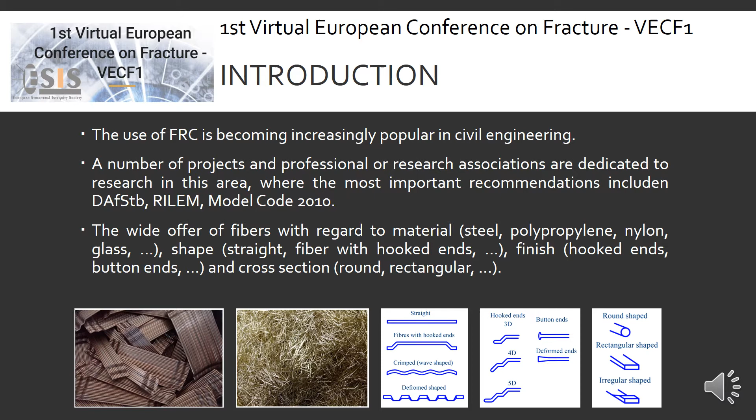It was proved many times that the addition of fibers to concrete improves the mechanical properties compared to plain concrete, especially tensile strength. In the case of fiber reinforced concrete, it is necessary to monitor the quality and control mechanical properties very carefully. Fiber reinforced concrete is widely used in the case of industrial floors, parking areas, foundation slabs, thin wall structures, and in reinforced concrete beams.

Still, existing knowledge and recommendations allow the use of fiber reinforced concrete for load-bearing structures to a very limited extent. The aim of the authors is to contribute to enriching the knowledge in the specific investigated area of fiber reinforced concrete beams without shear reinforcement.

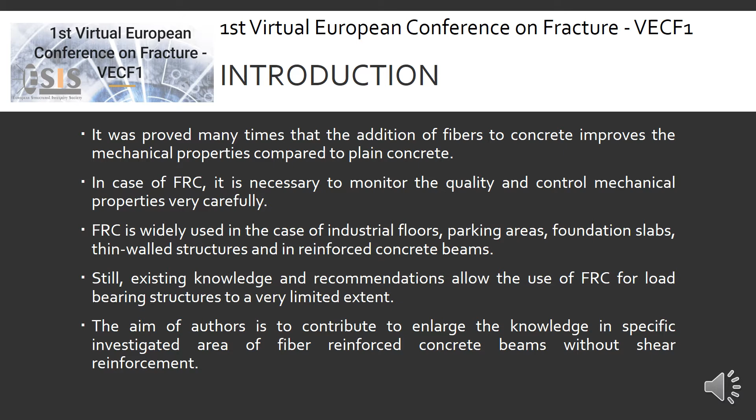A positive feature of fiber reinforced concrete is that when the first crack appears, the fibers in the concrete are activated, which are stressed until they are pulled out or broken, which adds dispersed reinforcement to the concrete. The tensile strength increases, but also the shape of the load displacement diagram changes. A change in the shape of the curve of the load displacement diagram of fiber reinforced concrete in comparison with plain concrete is illustrated in the figure.

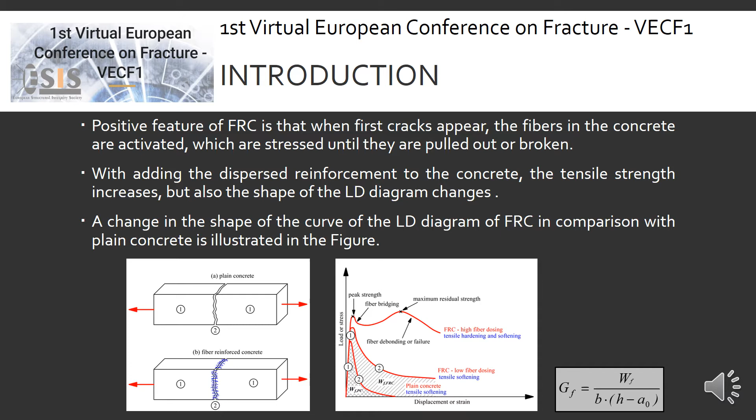The magnitude of residual tensile strength is influenced not only by the type of fiber used, but also by the dosage of the fibers. Fiber reinforced concrete structures are still able to carry external loads even after exceeding the tensile strength. Fracture mechanics or specialized constitutive relations are often used to describe mechanical properties of fiber reinforced concrete. Inverse analysis is also used to determine the mechanical properties.

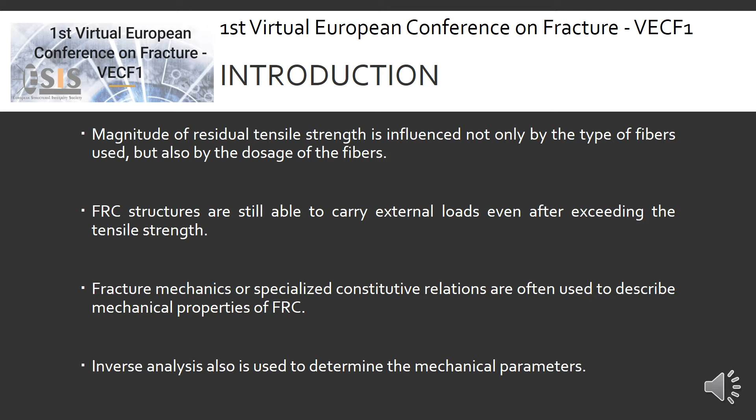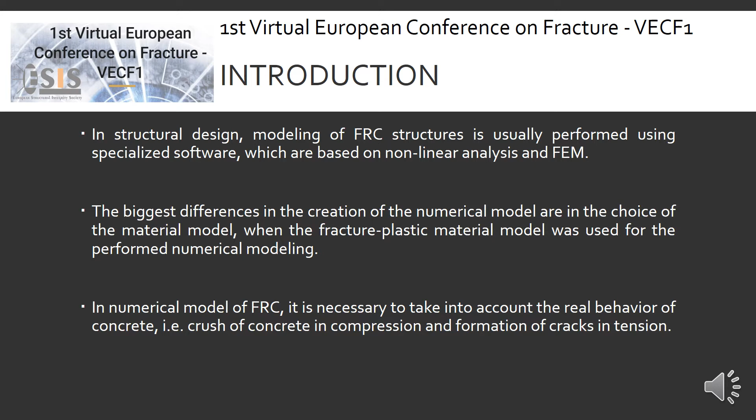In structural design, modeling of fiber reinforced concrete structures is usually performed using specialized software, which is based on nonlinear analysis and the finite element method. The biggest differences in the creation of the numerical model are in the choice of the material model, when the fracture plastic material model was used for the numerical modeling. In a numerical model of fiber reinforced concrete, it is necessary to take into account the real behavior of concrete, that is, crushing of concrete in compression and formation of cracks in tension.

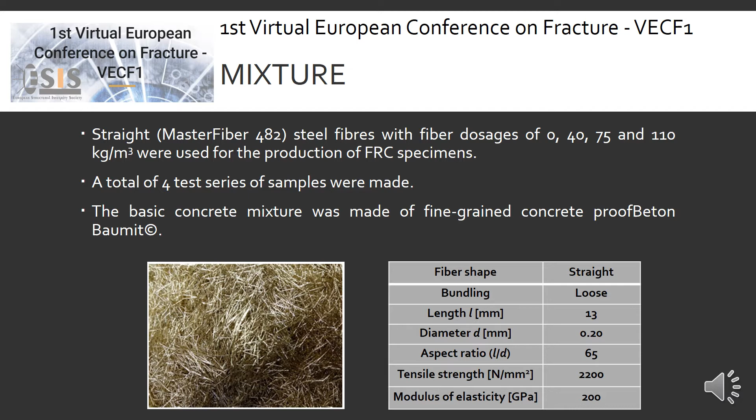The mechanical properties of plain concrete are: modulus of elasticity 27.1 gigapascals, cubic compressive strength 55.87 megapascals, cylindrical compressive strength 48.85 megapascals, splitting tensile strength 2.99 megapascals, and bending tensile strength 3.14 megapascals.

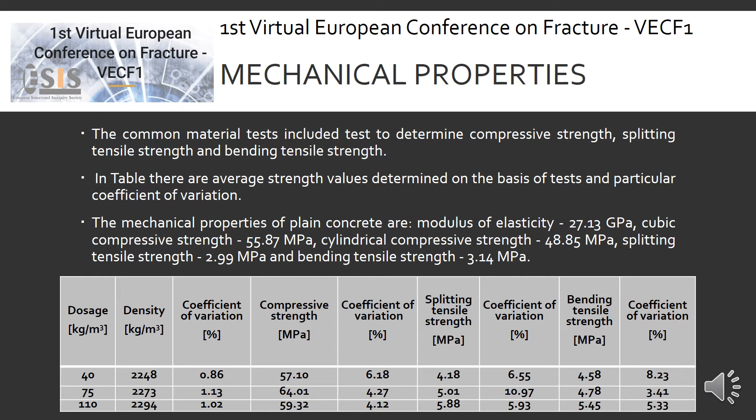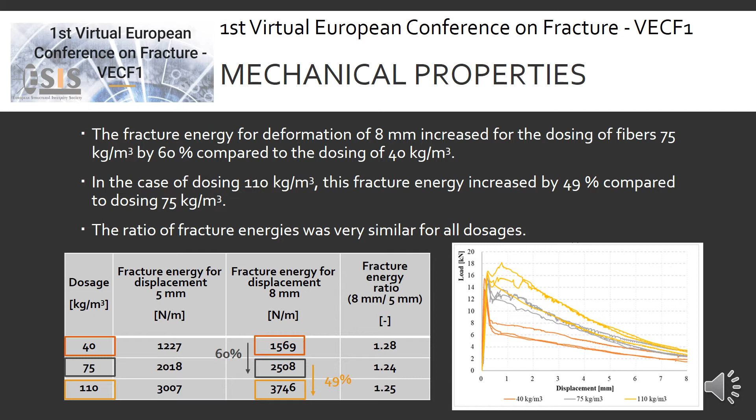Based on the 3-point bending test, the load-displacement diagrams were evaluated, which show the fracture energy for a deformation of 8 mm. It increased for the fiber dosage of 75 kg per cubic meter by 60% compared to the dosage of 40 kg per cubic meter. In the case of dosage 110 kg per cubic meter, the fracture energy increased by 49% compared to dosage 75 kg per cubic meter. The ratio of fracture energies was very similar for all dosages.

Research into basic material properties was followed by experimental testing of beams with a size of 150 by 150 by 700 mm. Beams with 2 reinforcing bars at the lower bottom, diameter 10 mm, and concrete cover was 20 mm. 2 beams were tested for each fiber dosage. Total of 8 reinforced concrete beams. The test scheme is shown in the figure.

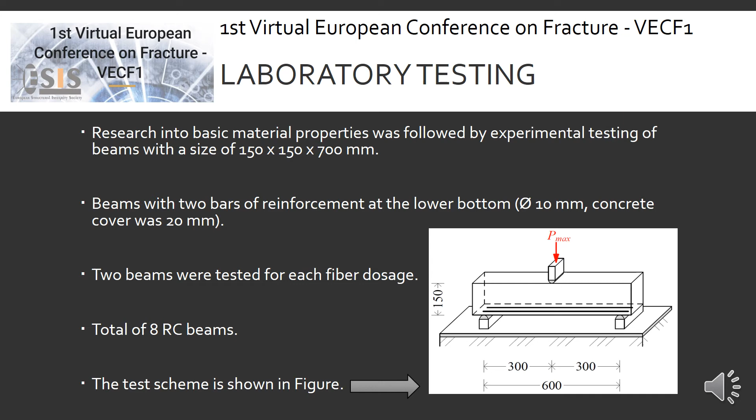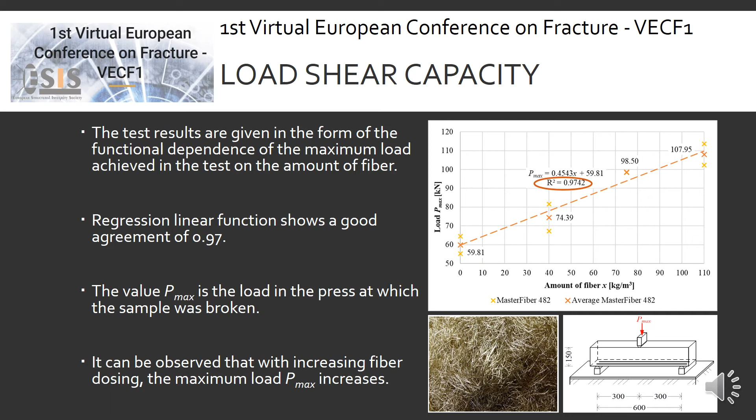The test results are given in the form of the functional dependence of the maximal load achieved in the test on the amount of fiber. Regression linear functions show a good agreement of 0.97. The value of maximum load is the load in the press at which the sample was broken. It can be observed that with increasing amount of fiber, the maximum load at which the beam has broken increases.

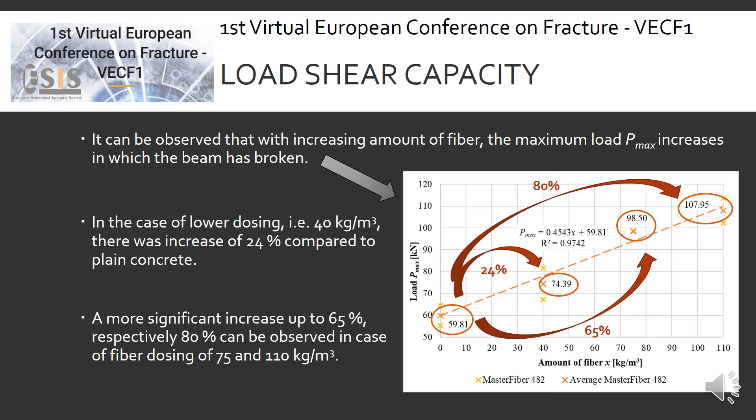In the case of lower dosing, that is 40 kg per cubic meter, there was an increase of 24% compared to plain concrete. A more significant increase, up to 65% and 80% respectively, can be observed in the case of fiber dosage of 75 and 110 kg per cubic meter.

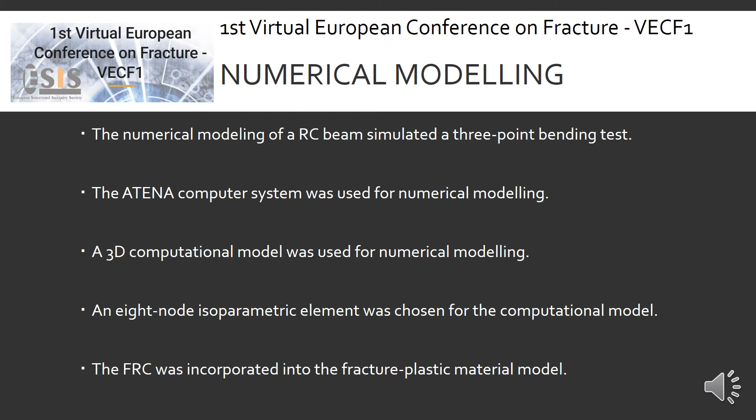Now to the part on numerical modeling. The numerical modeling of the reinforced concrete beam simulated a 3-point bending test. The Atena computer system was used for numerical modeling. A 3-dimensional computational model was used, and isoparametric elements were chosen for the computational model. The fiber reinforced concrete was incorporated into the fracture-plastic material model.

Nearly all the input parameters were taken from laboratory tests. The value of the specific fracture energy only was approximated, when the calculation was repeated iteratively. Two concepts were used to model fiber reinforced concrete. The first concept, for fiber dosing 40 kg per cubic meter, is based on the use of effective values of tensile strength and fracture energy. The second concept, for fiber dosing 75 and 110 kg per cubic meter, is based on the actual modeling of the concrete matrix and fiber reinforcement.

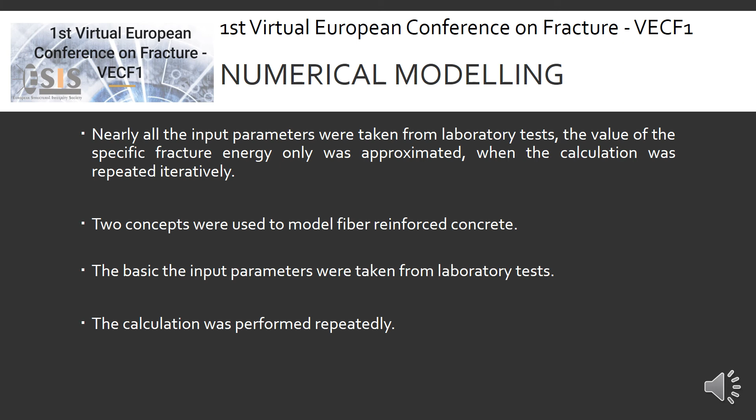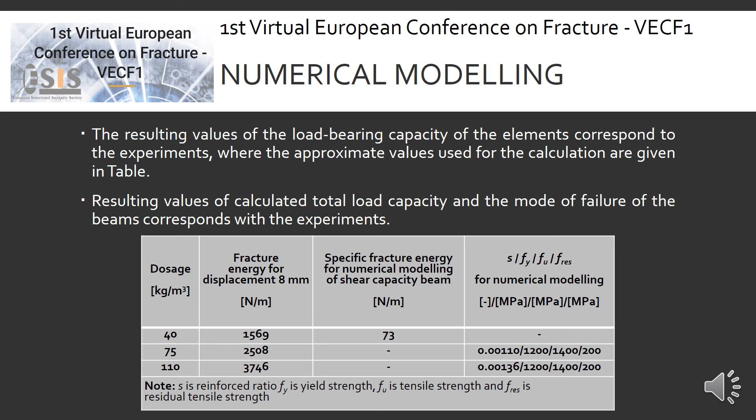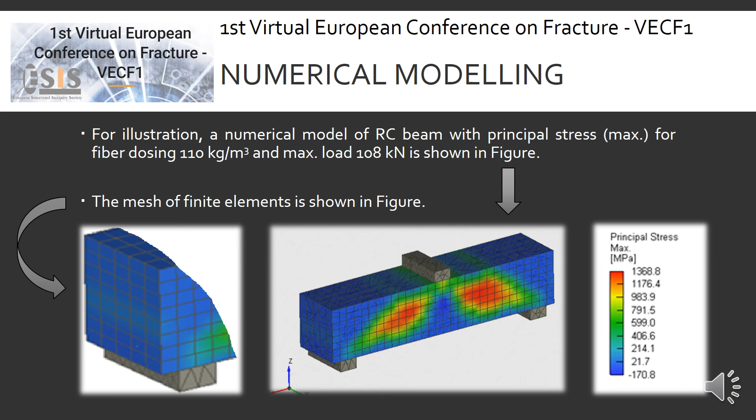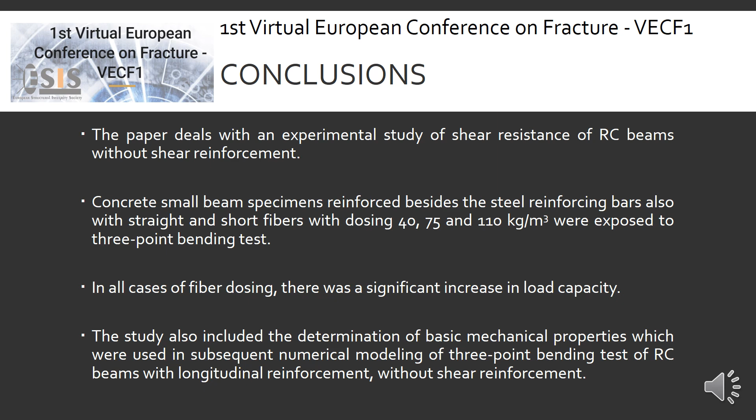Conclusions. The paper deals with an experimental study of shear resistance of reinforced concrete beams without shear reinforcement. Concrete small beams, reinforced with steel reinforcing bars and also with short fibers with dosage 40, 75 and 110 kg per cubic meter, were exposed to 3-point bending test. In all cases of fiber dosing, there was a significant increase in load capacity. The study also included the determination of basic mechanical properties, which were used in subsequent numerical modeling of 3-point bending tests of reinforced concrete beams with longitudinal reinforcement, without shear reinforcement.

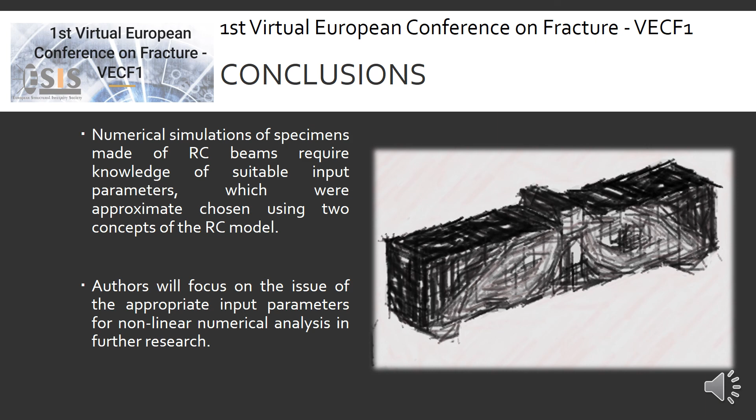Numerical simulation of structures made of reinforced concrete requires knowledge of suitable input parameters, which were approximately chosen using two concepts of the reinforced concrete model. Authors were focused on the issue of the appropriate input parameters for nonlinear numerical analysis in future research.